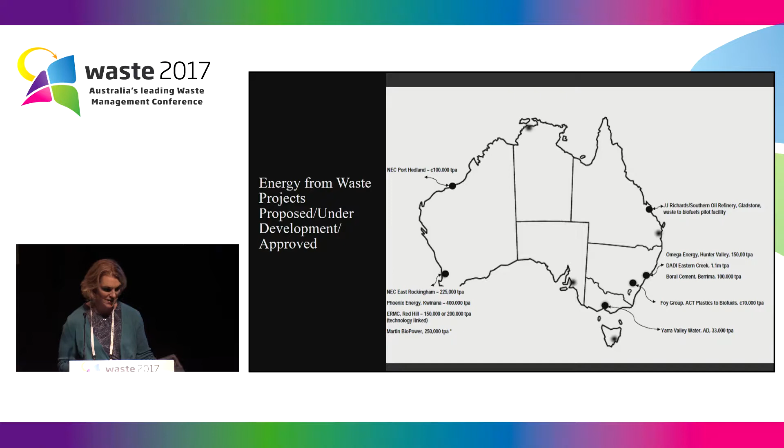You have the Phoenix Energy, the New Energy Corporation facility, ERMC actually have a project approval for their site, and then there's the proposed Martin Biopower with Suez and Monadelphous facility as part of the ERMC bid, and then there's the other New Energy facility in Port Hedland. So they're all the projects that essentially are in the pipeline in Australia at the moment. Some of them.

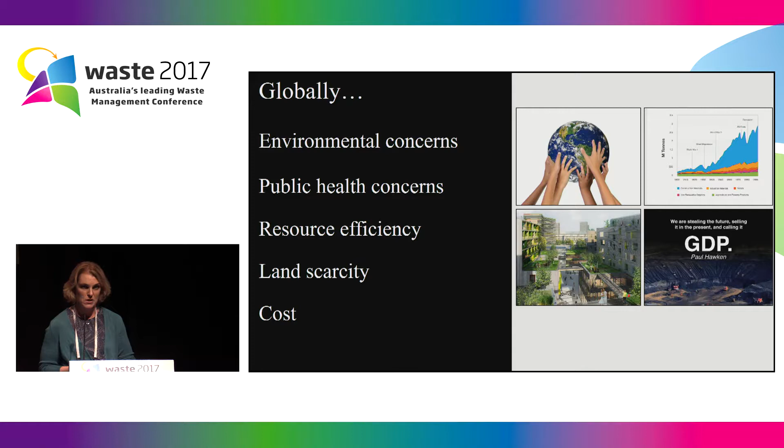So, globally, what's driving energy from waste and what has been driving it to date? Globally, environmental concerns are one of the key things, particularly in emerging nations. If you look to Indonesia, Sri Lanka, Mexico City, all proposing energy from waste, environmental concerns and public health concerns are 2 of the key drivers there. Resource efficiency is definitely one of the key drivers. In Europe and Japan, it's really land scarcity, not wanting to develop landfill, and cost. When you look at land scarcity in particular, costs come into play, so it can essentially be more cost effective.

But if we look to Australia, what are the trends in Australia? As I said, currently in Australia we actually don't have any thermal energy from waste for the three key waste streams, MSW, C&I and C&D. But I believe there is increasing public demand for greater resource efficiency and not being completely reliant on landfill. Over the last few years we have had a changing regulatory policy to support energy from waste, particularly with the New South Wales state policy and the WA policy as well.

Federal and state government support for renewable energy industries, and it's very hot at the moment. I think Matt mentioned CEFC say it's between 3.5 and 5 billion. I'd like to think I've heard them say it's 3 to 7 billion over the next 10 to 20 years. So there's definitely a very viable industry.

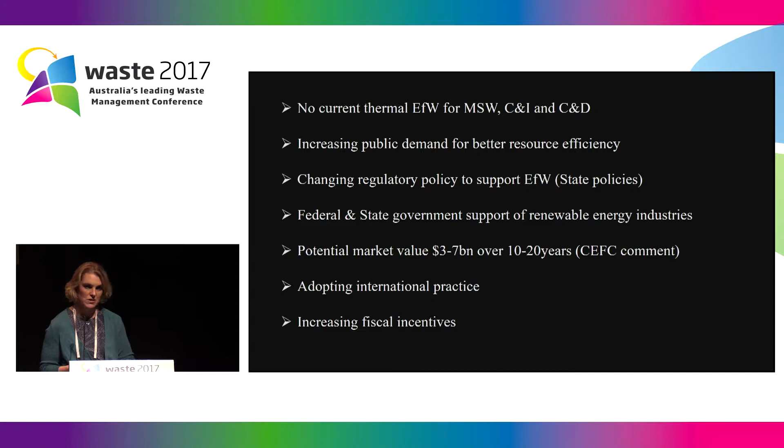And then Australia looking to adopt international practice. I mean, Australia, for a first world country, not having any thermal energy from waste here at the moment would be behind international practice. And then looking at landfill levies and other fiscal measures that are incentives that are promoting it as well.

Now, this is very much my take on it. This is not based on anything, but just my opinion. Where are we at the moment in Australia in terms of energy from waste? So I believe in New South Wales, there is definitely a feeling that the energy from waste policy could be viewed as an inhibitor. Garth and Regroup here today has said that it's not, and there's others that believe it's not, but some people, particularly people involved in emerging technologies, may consider the requirement to demonstrate tried and trusted and proven technology using similar waste streams in a similar jurisdiction as a difficult hurdle to overcome, and then the diversion requirements on their table one.

In Victoria, there's very much an organics-based focus at the moment. There's a lot of discussion around anaerobic digestion and composting and dealing with the food waste, while larger scale energy from waste is potentially not being spoken about as much. They feel under pressure to increase their levy, but they're trying to resist that a bit at the moment. Queensland without a levy is always a challenge, but there is the Biofutures Plan and the Biofutures Roadmap.

And certainly the Queensland Premier, I live in Brisbane, Annastacia Palaszczuk, I think she's viewing this as her legacy piece. She believes there's a $1 billion industry that can be grown in Queensland. It can create business, it can create employment. It's very supportive and complementary to the regional nature of large parts of Queensland, and it can grow on the existing skills and experience they have with the sugarcane and the biogas industry.

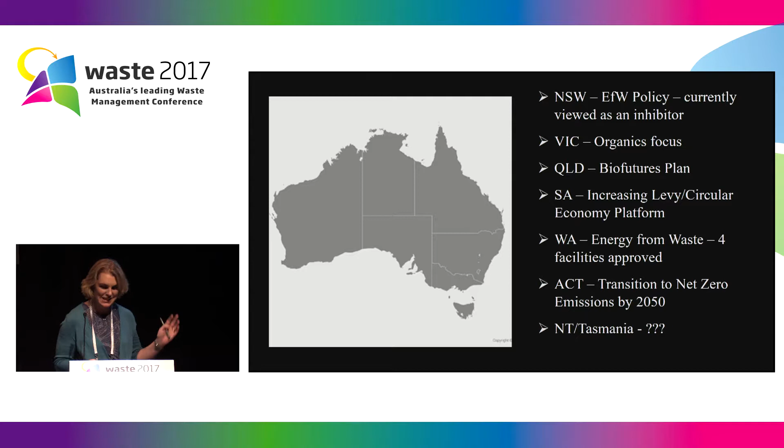Northern Territory and Tasmania, I don't know, anyone who wants to provide us with an idea what's happening there? I would be delighted to add some words of wisdom onto my slide. So happy to be challenged by any of those at the end. It's just purely my take.

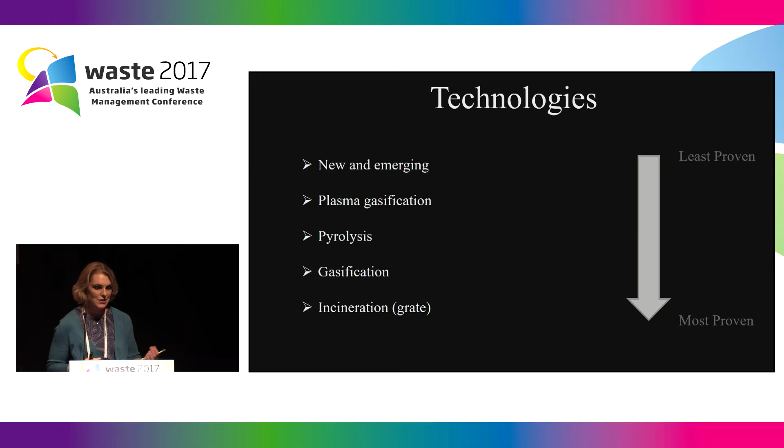Okay, so technologies, if we look at thermal energy from waste. Realistically, we have a whole heap of technologies. We have new and emerging technologies going down through plasma gasification, pyrolysis, and then grate incineration. And when you start looking at those technologies, we go from the least proven down to the most proven. As Detlef said, we have a large number of reference facilities for moving grate incineration. Gasification, there's a lesser number, pyrolysis, lesser number, and so on.

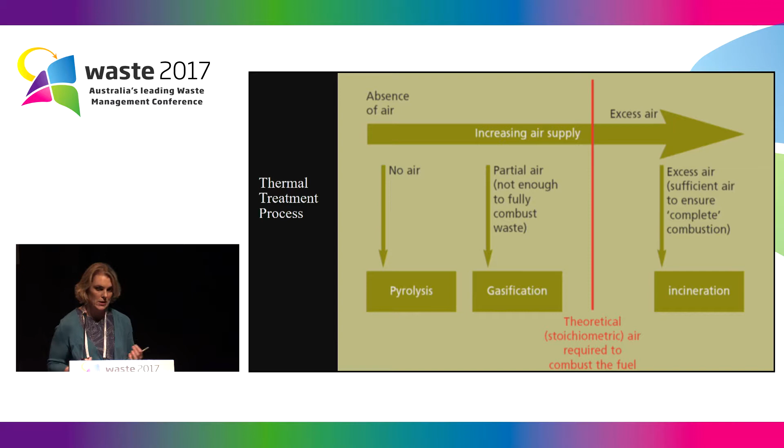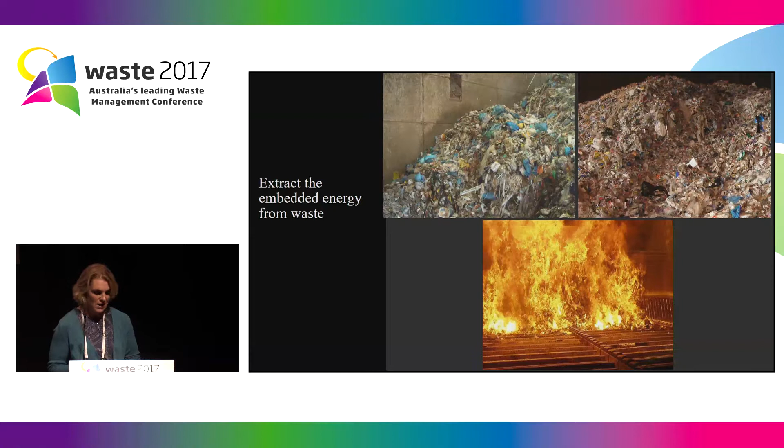If we look at the three main technologies, pyrolysis, gasification, and incineration, what's the key differences between them? Very simplistically, pyrolysis is thermal treatment in the absence of air. Gasification, there's partial air, but not enough to fully combust the waste. And then incineration, moving grate technology or fluidized bed, is where there's excess air, sufficient to ensure complete combustion. But essentially, they are all extracting the embedded energy from the waste, and that's why it's known as energy recovery.

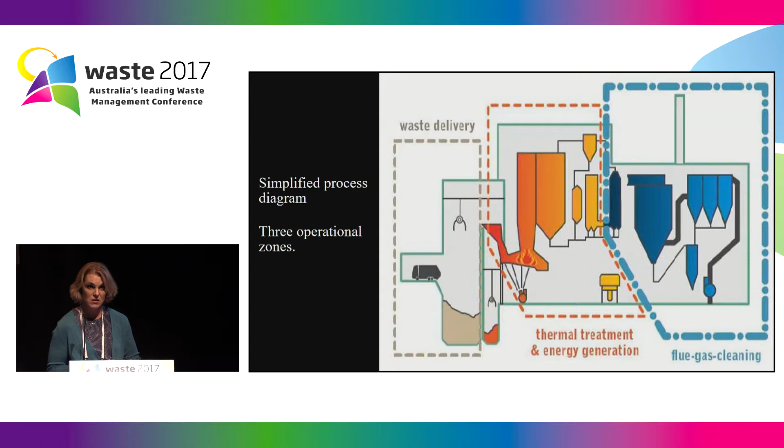Okay, so we had a much more complex diagram from Martin, but most energy from waste plants are a simplified three-stage process. It's the waste delivery and waste acceptance. Then the thermal treatment and energy generation in the middle. And then, if anyone's ever been in an energy from waste plant, the vast majority of the plant is actually given over to the flue gas treatment and the management of the air emissions.

Okay. So, on to how can we make these projects succeed in Australia? Well, first of all, we really need to learn from international experience, and we need to learn from what has gone well, what hasn't gone well, and what really didn't go well, and what is the ugly. And also look at what else has happened overseas.

We really need to understand the technology and understand what you want to use. So understanding how this technology is going to work for your proposed waste streams. Who are the providers, and what are their track records? And also key, I think, for Australia, have they any experience of working in Australia, or what's their understanding of the Australian market, and how can they deliver a project in Australia?

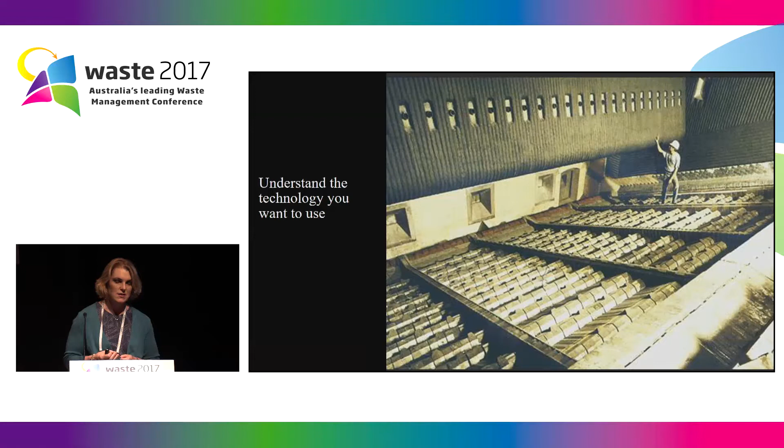Certainly, I had a conversation with somebody yesterday with regard to bankability. Do you need to have a named technology provider to get to financial close? And realistically at the moment, you would need to be there or thereabouts with your technology provider defined and agreed prior to reaching financial close.

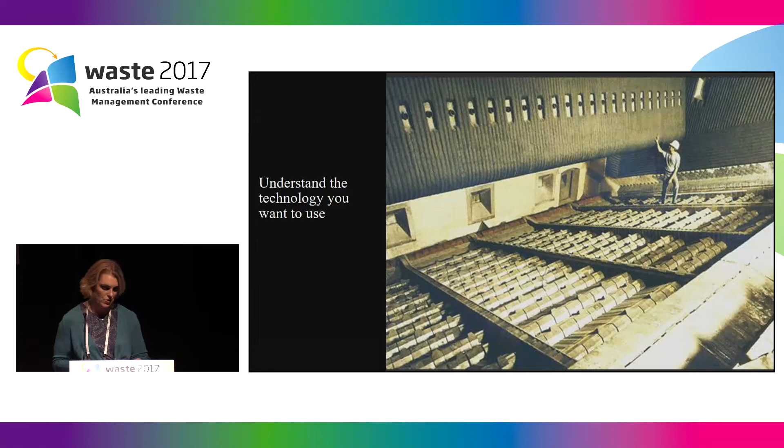Next really is understanding and knowing your waste streams and the composition of those waste streams in detail. And this will require doing detailed compositional analysis and really understanding everything that's in that waste stream and potentially what's in the waste stream that can cause a problem. And then when you determine what's in the waste stream, if there are components that could create an issue, how are you going to get it out, very, very clearly describing and demonstrating how you're going to get it out.

I noticed on Garth's slide earlier there was a comment about PVC and the technology that they will employ to ensure that there will be no PVC within the RDF feedstock. Again, it's an issue. It's a potential dioxin-forming material. It's something that the regulatory authorities are going to be interested to know how you're going to manage. But there's a lot of other components that you just really need to provide very, very clear definition of.

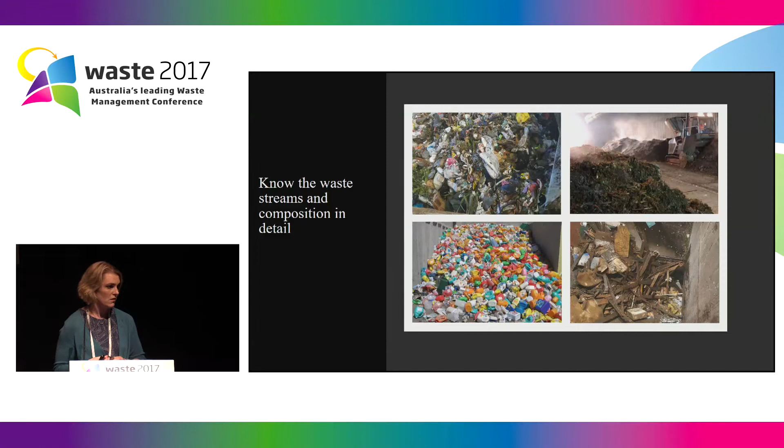And I'd really stress that this can be a real challenge sometimes in Australia. Information on waste streams and waste composition can be difficult to get, but there's a requirement to invest in that.

And then the next part is, when you work out what the waste streams and the composition are, you actually need to consider the availability of that feedstock over the duration of your facility. So this really is modelling and forecasting, looking at growth projections within your catchment area, looking at competing facilities who could be trying to draw on that same feedstock, and also looking at state diversion targets. So looking at current but also future diversion targets, mapping that out and undertaking quantitative modelling to demonstrate that the feedstock is available for the duration of your project.

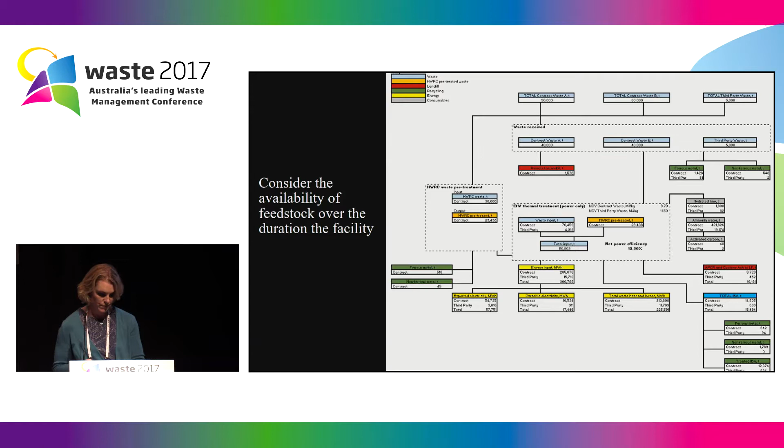But really, taking into consideration the material availability and your location, it's what is the optimum size for your facility, and then modelling and demonstrating that that size is appropriate, looking at sensitivity analysis, different sizing and different scenario testing, and actually providing that as evidence as part of your process.

It's really important to consider changes and disruptors, and we're living in a really dynamic world at the moment. There are huge changes and disruptors happening all the time. I think of the Uber example, the poor taxi drivers: whoever thought Uber was going to come along and just wipe out basically their entire industry in a case of 6 to 12 months? But solar is another big disruptor for the energy market at the moment.

The circular economy is an interesting one, and how that will interplay with the energy from waste market. The EU has released a paper around the relationship between the circular economy and energy from waste and how that can happen. But I noticed yesterday I got an email through to say Apple now wants all our phones back. So producers are now saying, well, actually, we don't want you to throw it away as waste. We want it back. So how could that impact your waste streams, your waste composition, and your waste availability over the years?